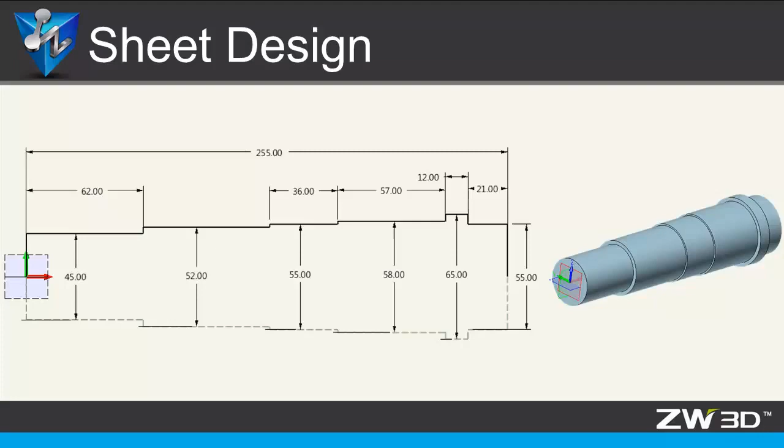Sketch Design. In this video, you will learn how to draw the sketch for designing a shaft. Create a new file and name it Shaft. Right-click, then Insert a sketch. Pick the XY datum to draw the sketch.

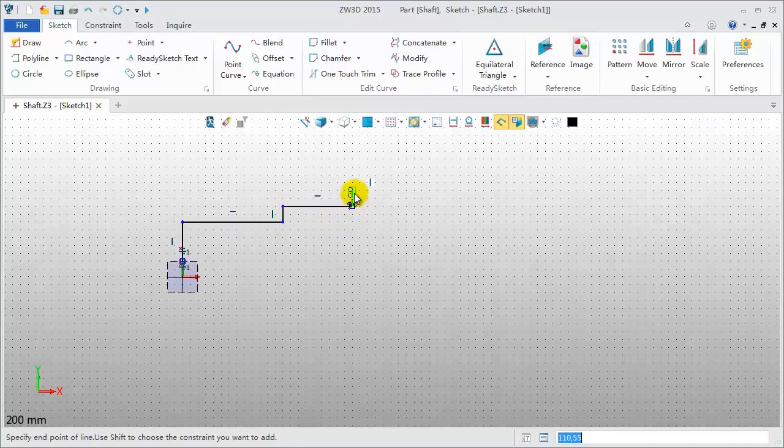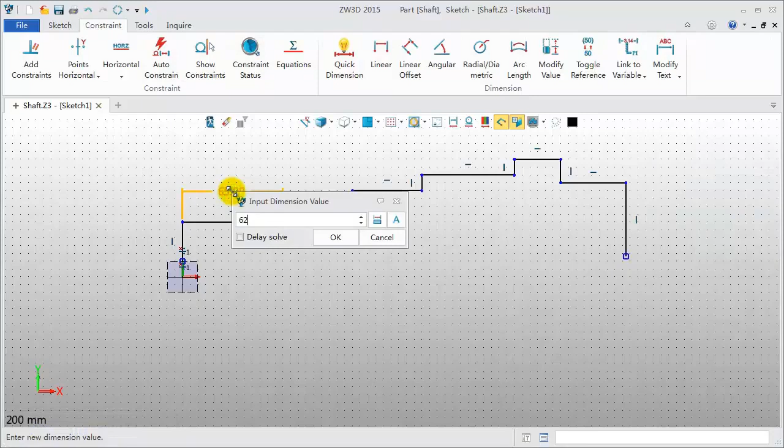Next, add dimension with the Quick Dimension tool. The first horizontal line is 62 millimeters. The third is 36 millimeters. The fourth is 57 millimeters.

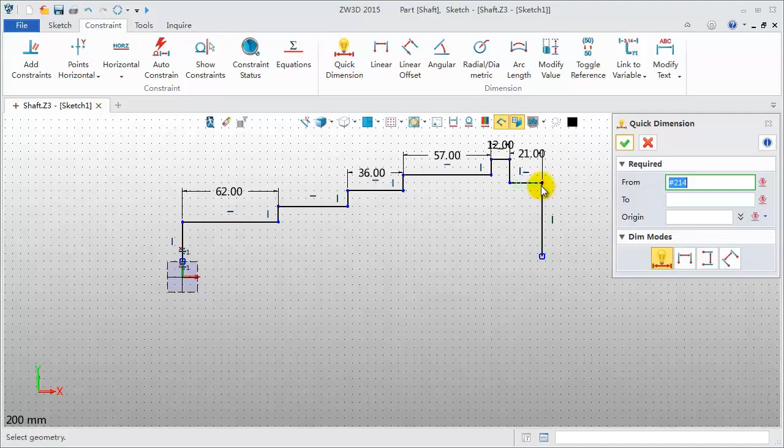The fifth is 12 millimeters. The sixth is 21 millimeters. The whole length is 255 millimeters.

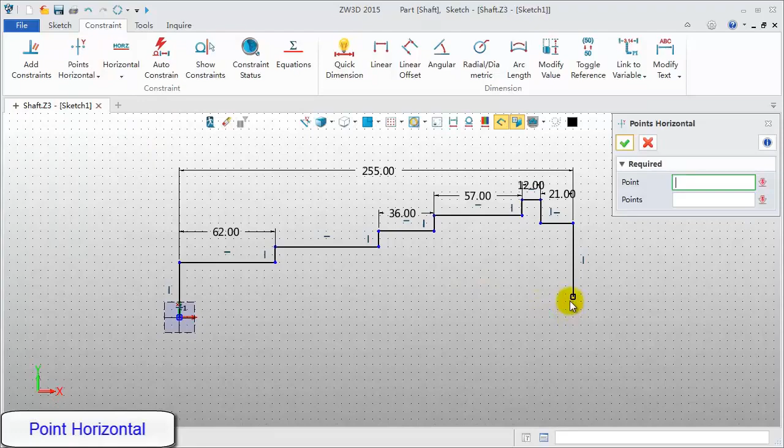Now, with the Point Coincident tool, fix the endpoint of the first vertical line to the original point. Add the horizontal constraint for the endpoints of two vertical lines.

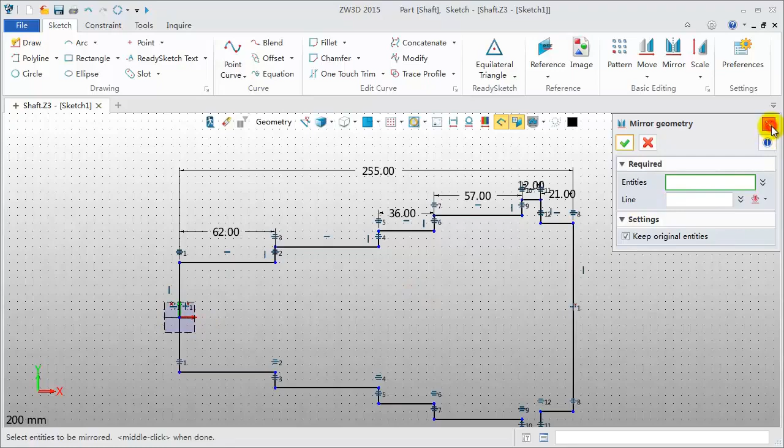Next, mirror the polyline on the x-axis. Click Mirror, window pick all lines, pick the x-axis, turn off the dimension and constraints for the clean sketch. Convert the mirrored polyline into construction lines.

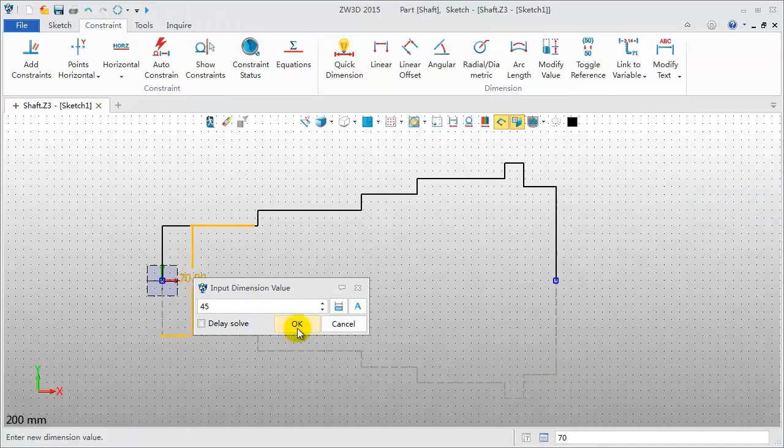Then, we can add vertical dimensions. First one, 45 millimeters. Do them one by one. Now, all vertical dimensions are finished.

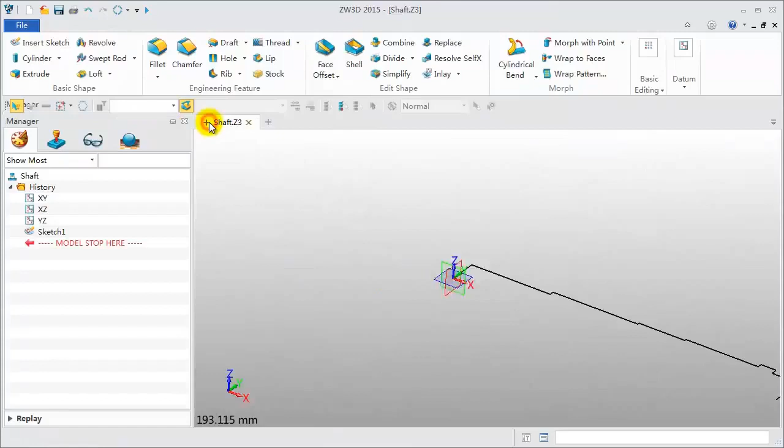Turn on the color, dimension, and constraints to check again. Sketch is well defined. Exit the sketch environment back to modeling. Revolve the sketch to get a shape.